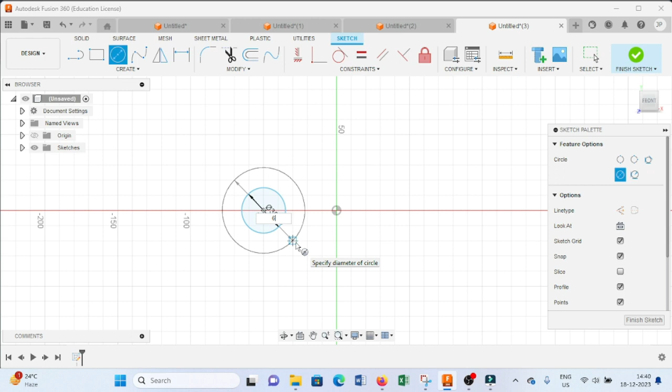After creating such circles, now the next what we have to do, we have to create one more circle of 25 mm diameter. Then we will draw one more circle of 50 mm diameter. So just create a 25 mm diameter circle.

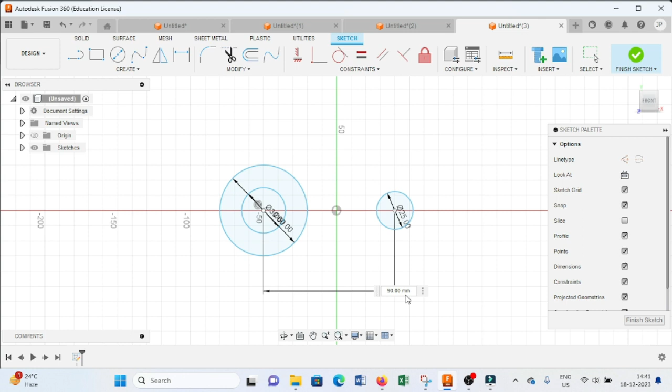Select this dimension command from here, and the dimension is 60 mm as per the drawing. Now the next, select the circle command, draw a circle of 50 mm diameter, press enter. So we have completed this one and this one.

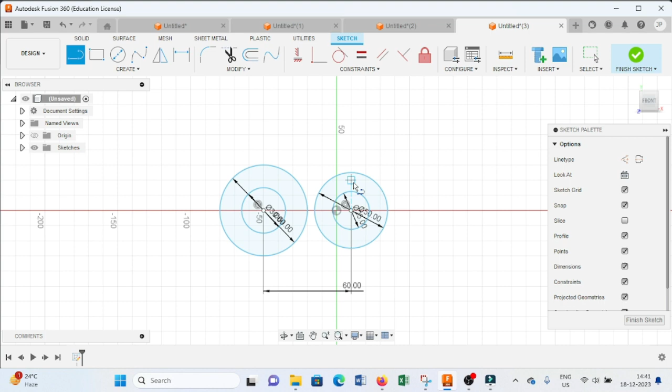Now draw a line to connect this point to this, and similarly connect this one. Then the next what we have to do, we can see here that you have to draw a circle of 25 mm diameter at an angle of 45 degrees.

And this is 100 mm, the distance between the center of this circle and this circle. So draw a line, a reference line at an angle of 135 degrees and 100 mm, and press enter.

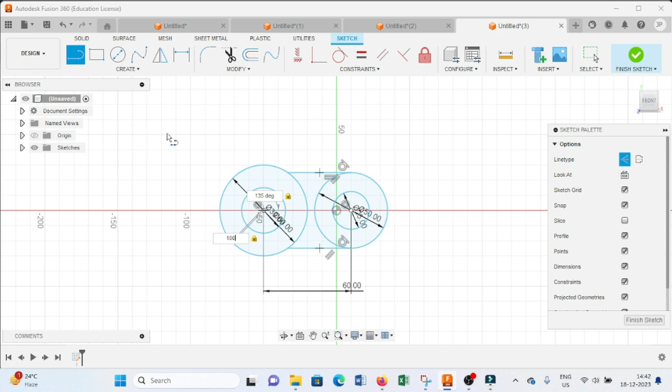After this, what we have to do, we have to draw this circle of 25 mm. So select this one, draw a circle of 25 mm, press enter.

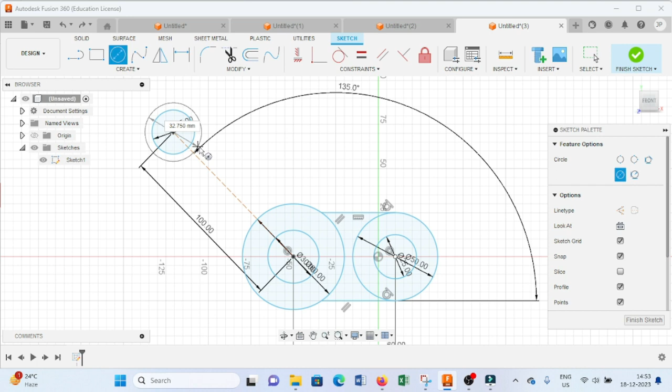After drawing this circle, now what we have to do, we have to create this particular circle of radius 17.50, or we can say the diameter of 35 mm. So draw a circle of 35 mm diameter and press enter.

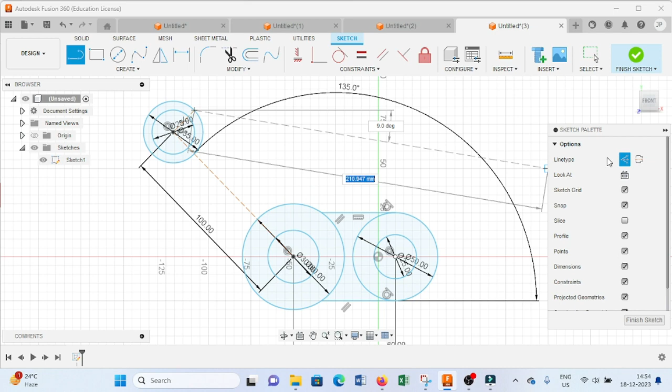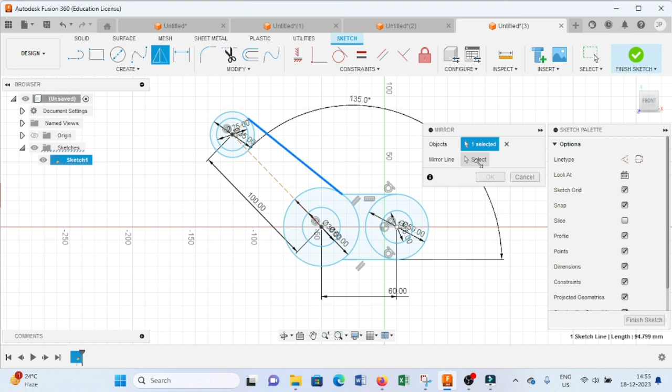After this, draw a line in this way. Press escape, select this line, press escape. Similarly, select this mirror command, select this line, select this as a mirror line, and press OK.

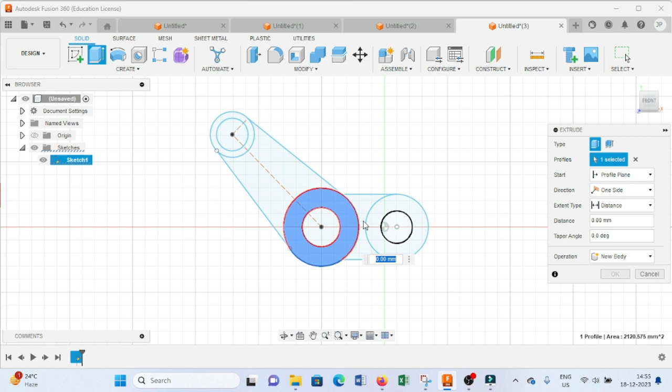Now the next, finish the sketch. First we have to extrude this particular hollow cylinder. As per this drawing, we can see this is 60 plus 10 plus 20 plus 10 plus 20, it is 120 mm. So extrude it up to 120 mm, press OK. Again visualize this particular sketch.

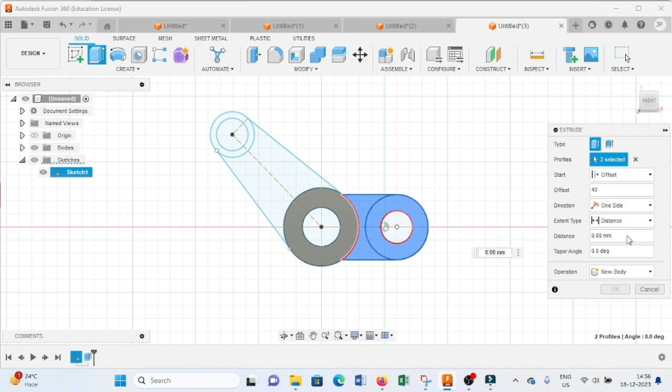After this, what we have to do next, we have to extrude this profile up to 40 mm from an offset plane at a distance of 40. For that, select this extrude command, select this profile and this profile, and from here we will select this offset and provide here 40, and the distance we provide 40, and press OK. So from here we can see we have created the same one.

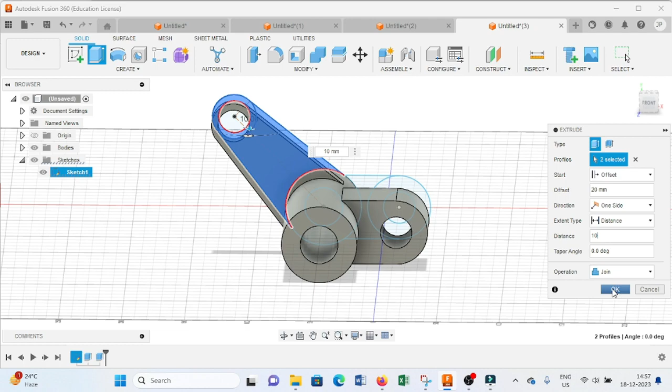And now the next what we have to do, again select this extrude command, select this one and this one, and from the drawing we can see this part at a distance of 20 mm from this particular surface. For that, again we choose this offset, select this offset at 20, and extrude it up to a 10 mm thickness, and press OK. So we have created one flange.

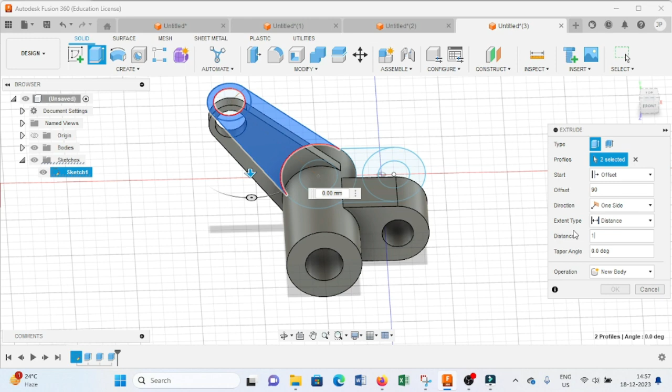Next, again we select this extrude command, select this one and this one, and from here again we select this offset, provide here this is 90. We can see from here this is 20, this is 10, this is 60, so complete is 90, and the thickness is 10. So we will provide here 10 and press OK. So we have created such kind of object.

Now the next what we have to do, we have to provide the physical appearance. For that we select this appearance command, and from here, as per our drawing, this is green color paint. So here I provide this green color paint and press close.

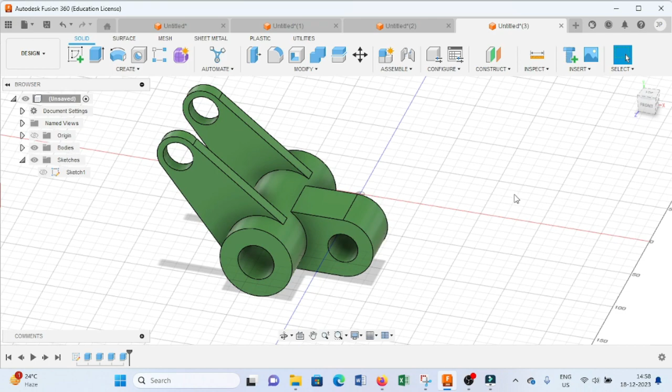So as you can see what we have done, we have created the same object what we have seen in this particular image. So this is the way how to create such kind of objects.